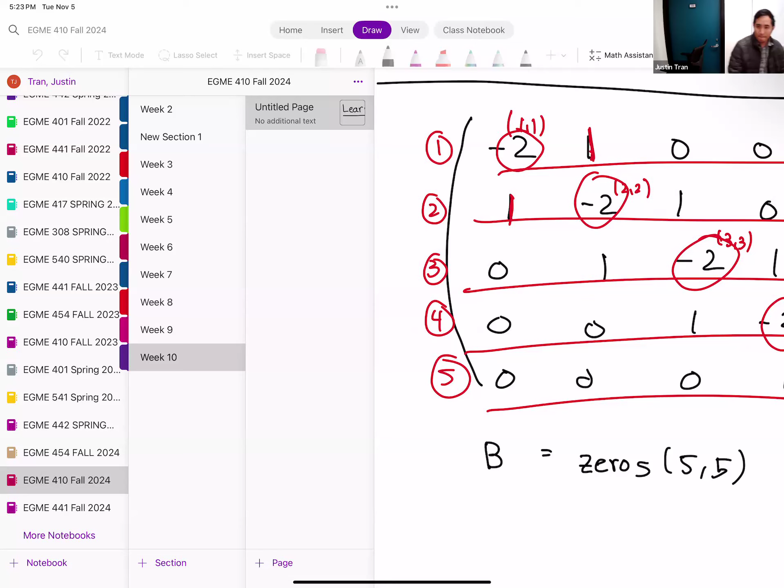I was studying for this combustion class. Oh, I see. Do you have a midterm recently? Midterm tomorrow. Oh, dang, pretty early. Yeah, that's good, second midterm. I was just trying to finish up during optimization. Oh, okay, I see. Now I'll catch up. Okay, sounds good.

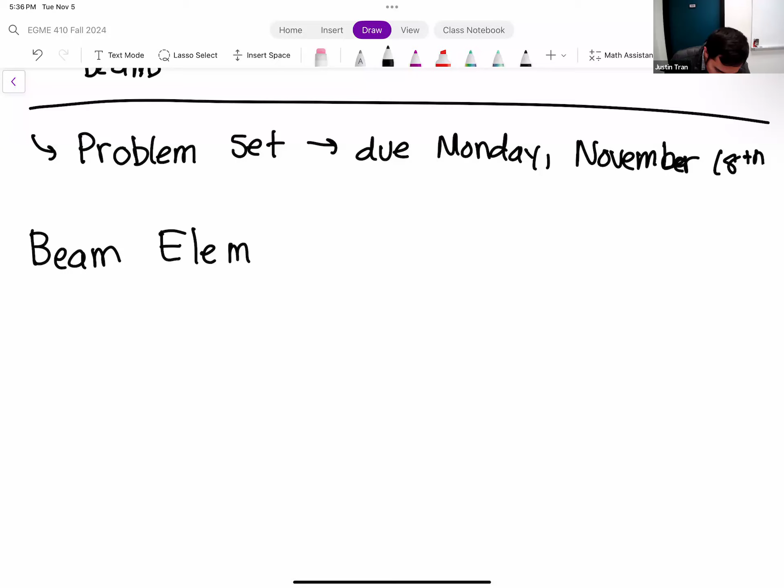We've seen beam elements before. If you think back to ANSYS activity 4, a big part of that activity was going over beam elements. When you compare a beam element to a traditional solid element, one of the unique qualities was that beam elements account for the rotation of the element itself.

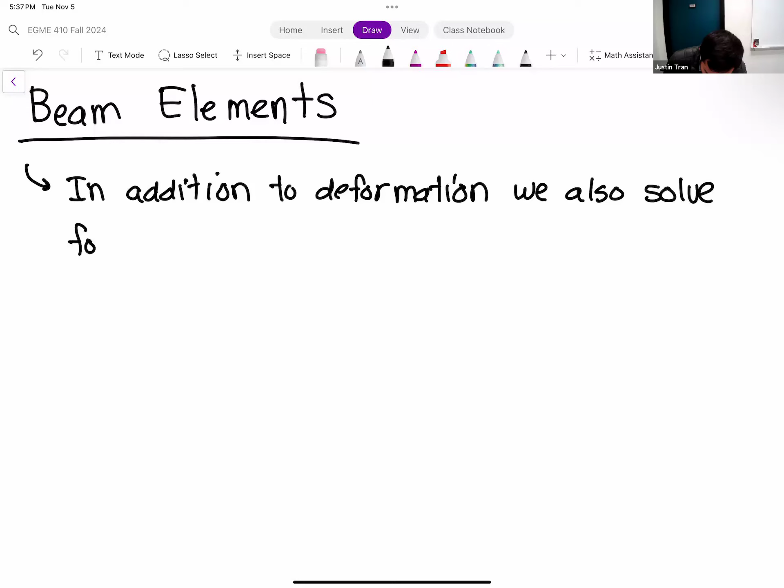In addition, every solid element type will compute deformations, and we saw that in our springs and trusses as well. What's unique about beams is that in addition to deformation, we're also going to solve for the element's rotations.

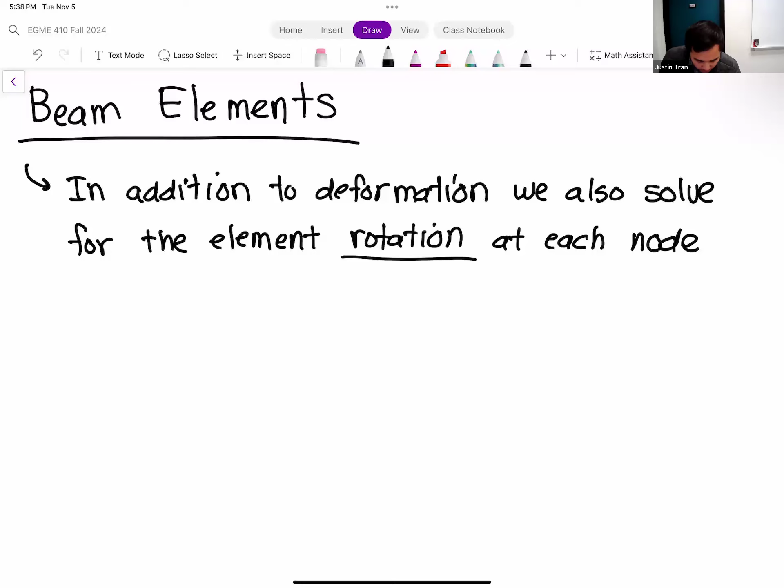Let's see what that looks like. We have our standard slender element that looks like this. The left side of the element we're going to call node 1, and the right side of the element we're going to call node 2.

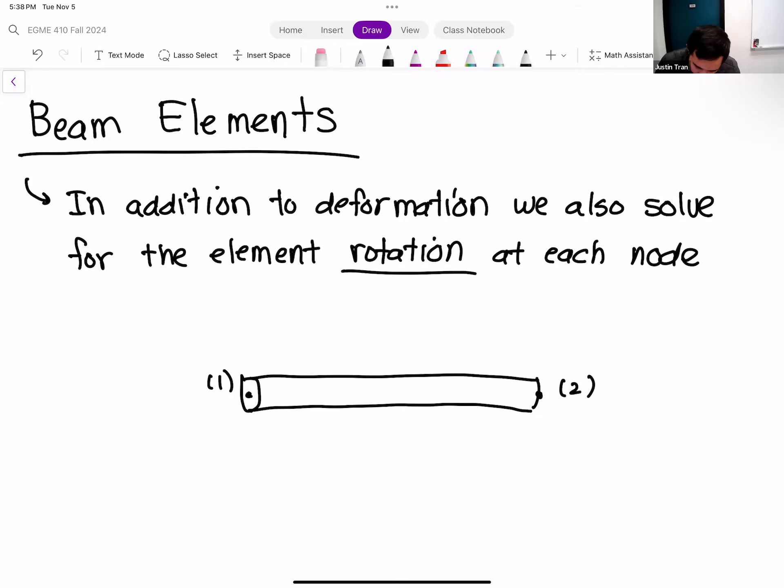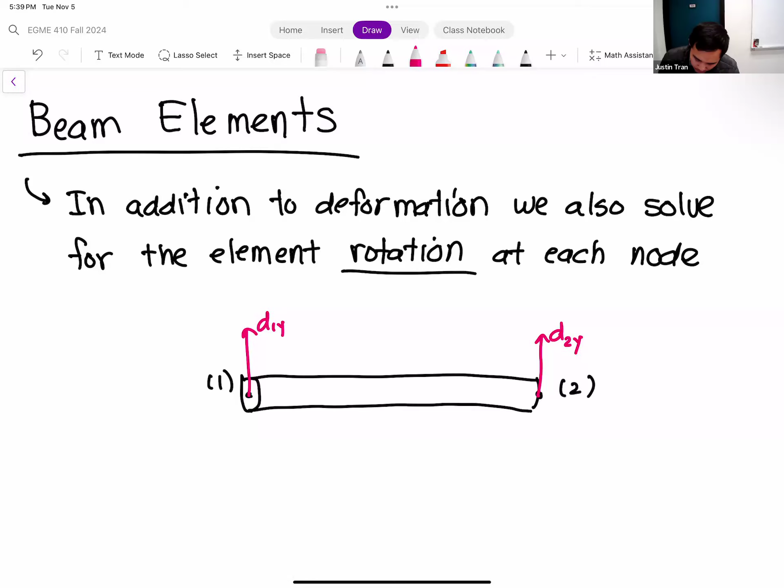So far in our truss elements we've only considered axial deformation - that's deformation that's parallel to the element itself. For beam elements, we're going to consider all other modes of deformation. Another way a slender element can deform is perpendicular to the element itself. We have D1Y and D2Y.

D1Y and D2Y here represent what's called transverse deformation - in other words, deformation that's perpendicular to the element itself. That's nothing too new, it's just adding another dimension to our deformation. But D1Y, D2Y, those are deformations at its core.

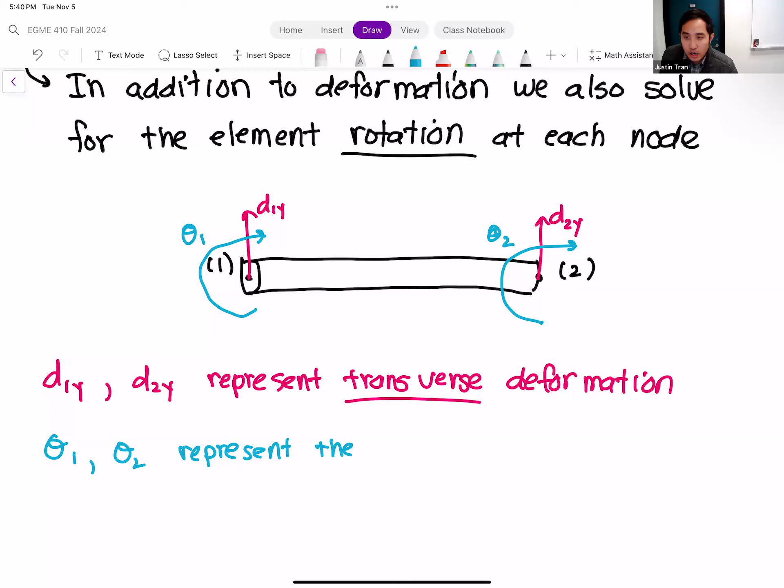What's unique about beams is that in addition to the transverse deformation, we can also compute the orientation or slant of the elements at those nodes. We denote those by angles: theta 1, theta 2. Theta 1 and theta 2 represent the element's orientation or tilt at nodes 1 and node 2.

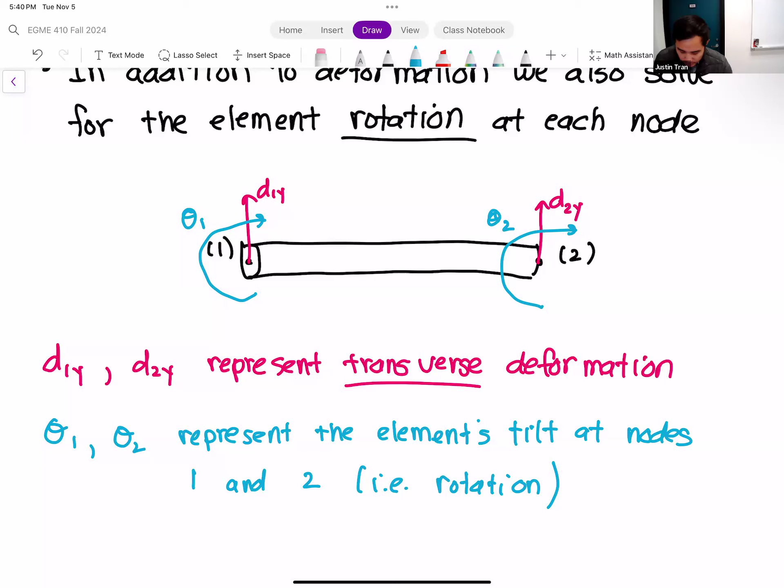So the beam elements that we're going to consider from here on out are going to have transverse deformation, so that's new. And it's also going to have rotation as well. So these four quantities are now going to be our degrees of freedom for our beam elements.

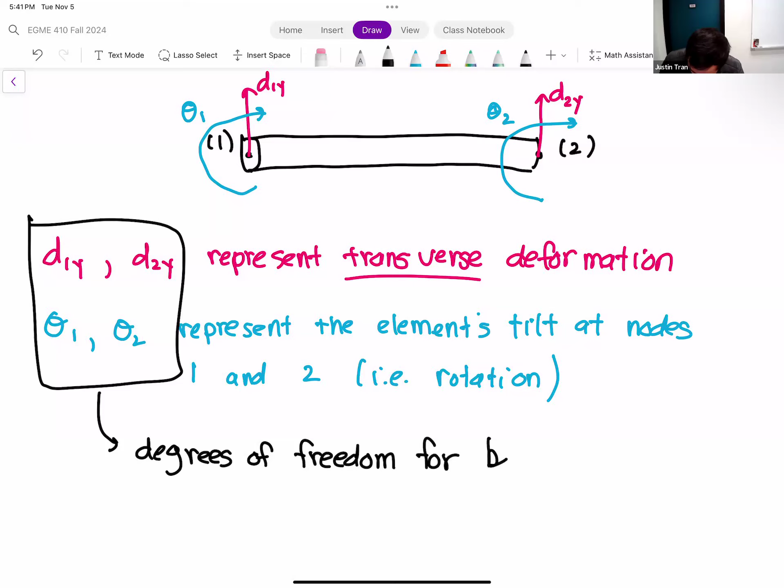So when we consider the transverse deformation, we consider the rotation, and we put that together with our truss deformations, which are the axial deformations, we basically covered all of our bases for 2D deformation of elements.

And so just to paint the picture here, truss elements and spring elements only have axial deformation. They have D1X and D2X. And I guess if you want to be specific, these are all deformations that are local to the element itself.

So that's the idea with beams. With beam elements, we're going to consider transverse deformation and rotation, and we're going to ignore axial deformation for now. We're going to bring those back eventually, so we're going to be able to do problems with beams and trusses and springs all together. Those things are not going to go away, but for now we're just going to focus on the transverse deformation and the rotations.

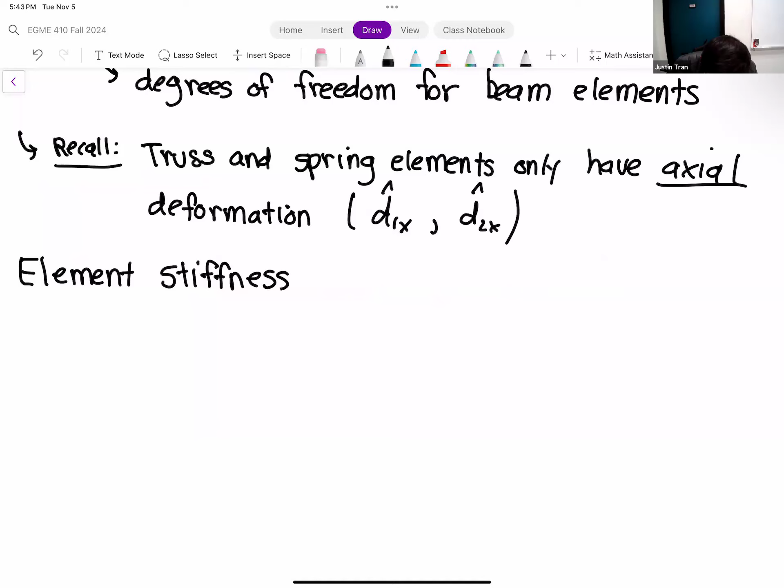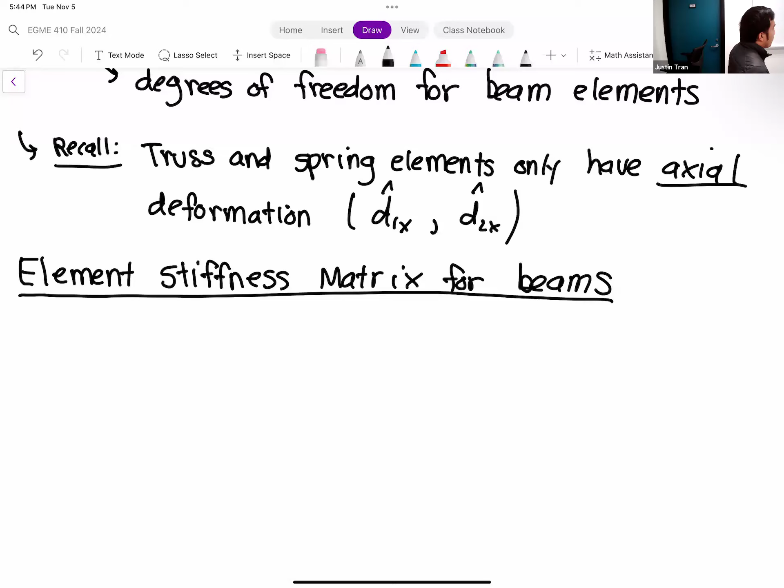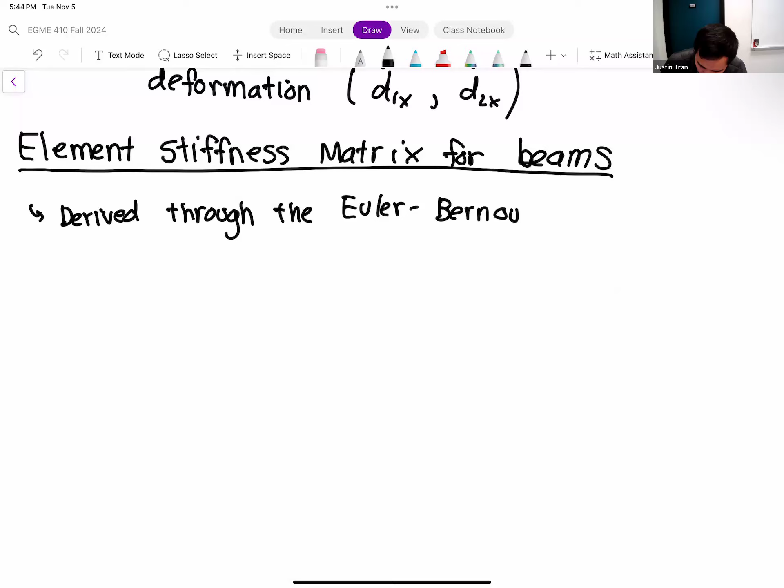So in the notes, you'll see that there is a derivation based on beam theory. I go through the Euler-Bernoulli beam equation, and I use that to derive the element stiffness matrix. We are a little bit behind, so I'm going to skip that derivation, and I'm just going to give you the formula for the element stiffness matrix straight up. This is derived through the Euler-Bernoulli details in the notes, but the element stiffness matrix is the following.

So first thing to note here is we have our constant factor out in front. We have E, E is a familiar player here. E is the Young's modulus of our element. I is something new, so I is the moment of inertia of the cross-section of our element. And we have L, which is the length of the element, which again is a familiar commodity.

So our element stiffness matrix for a beam is 4 by 4, because for every beam element we have 4 degrees of freedom. We have the transverse deformation at each node and the rotation at each node as well. So that's going to be four entries.

And so our element stiffness matrix here is 12, 6L, minus 12, 6L. That's the first row of the matrix.

And once again, I'm going to use the same trick that we used for the 2D truss element stiffness matrix, and just know that this is symmetric. So whenever you write a row, you can write it into a column. I'm going to leave the column blank just to save myself a bit of time, but remember that you can write it into the column there as well.

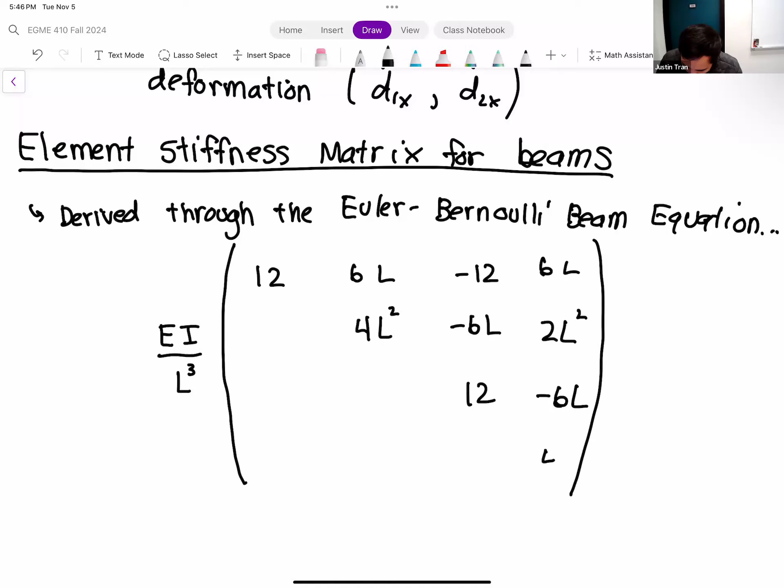Then we're going to multiply this by the degrees of freedom of the node itself. So here's where it gets a bit interesting, because we're actually kind of mixing different quantities with different units within the same matrix.

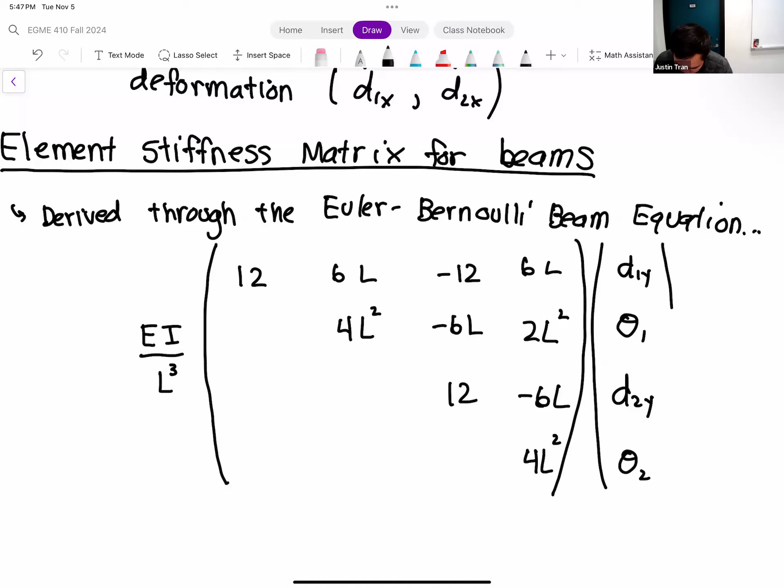So first row, that's going to be a transverse deformation row, so that's D1Y. Second row, it's going to be a rotational deformation, so that's theta 1. Then third row is going to be D2Y, and then fourth row is theta 2. So that's the matrix itself.

And then on the right-hand side, we have the corresponding nodal forces, or nodal loads. We have F1Y, M1, F2Y, and M2.

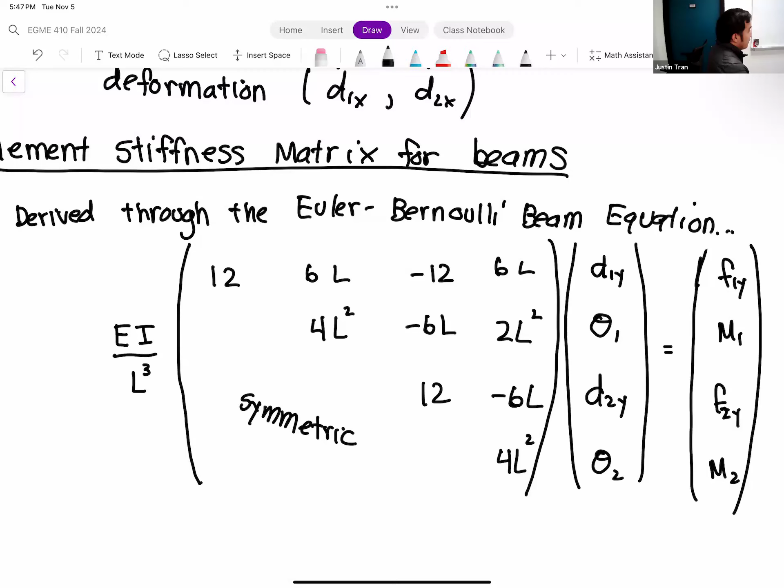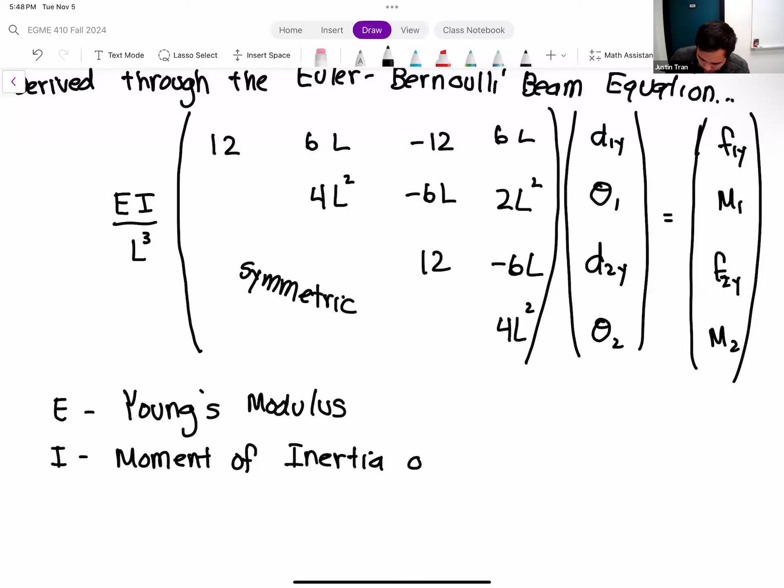Okay, so that is our element stiffness matrix there. Let me label a few newcomers here. So E here is the Young's modulus of the element. I here is the moment of inertia of the cross section.

L there is the length of the element.

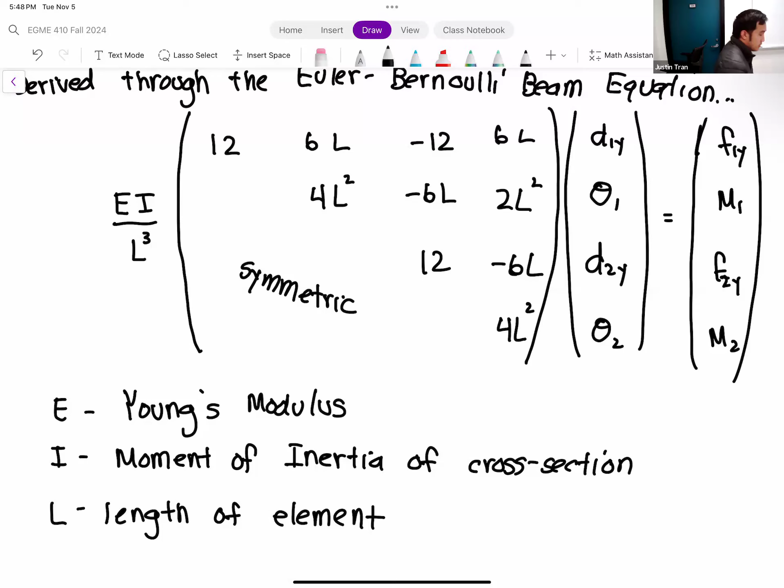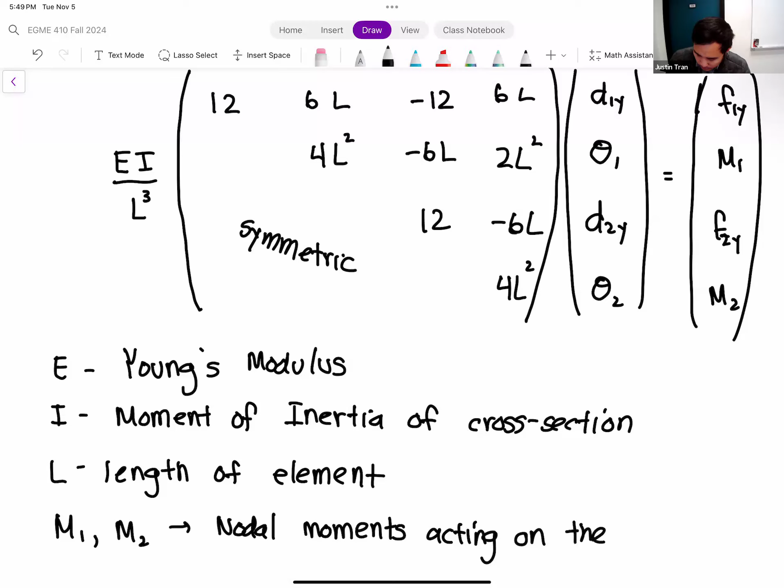And then the other newcomer here is on the right-hand side. For that forcing vector, we typically only have nodal forces, but for our rotations, we instead have nodal moments or nodal torques. M1 and M2, these are the nodal forces, or nodal moments, excuse me. So those are the moments that are acting on the nodes, right? So sometimes you'll hear me call them torques. Torques and moment, in this context are kind of interchangeable.

All right. Any questions on the element stiffness matrix for a beam?

All right, so that's the main part of this lecture here, and we're going to be doing some examples soon. For the examples, they're going to follow the exact same process that we've done before. The only thing is that for beams we're going to use this element stiffness matrix instead of the other one. But we're still going to follow the same process of element stiffness matrix, assembly, boundary conditions, and solve. The only thing that changes here is the element stiffness matrix.

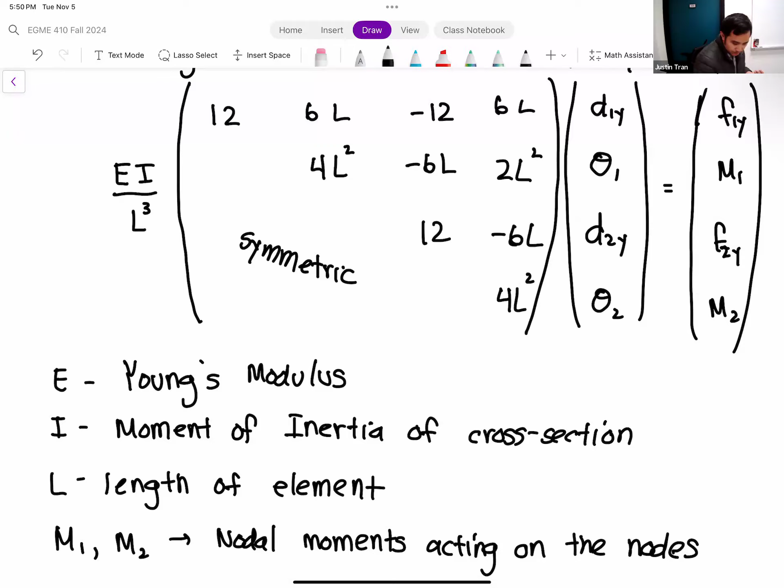But before we jump into an example, I do want to revisit the idea of the supports, or in other words, we're looking at the constraint type boundary conditions.

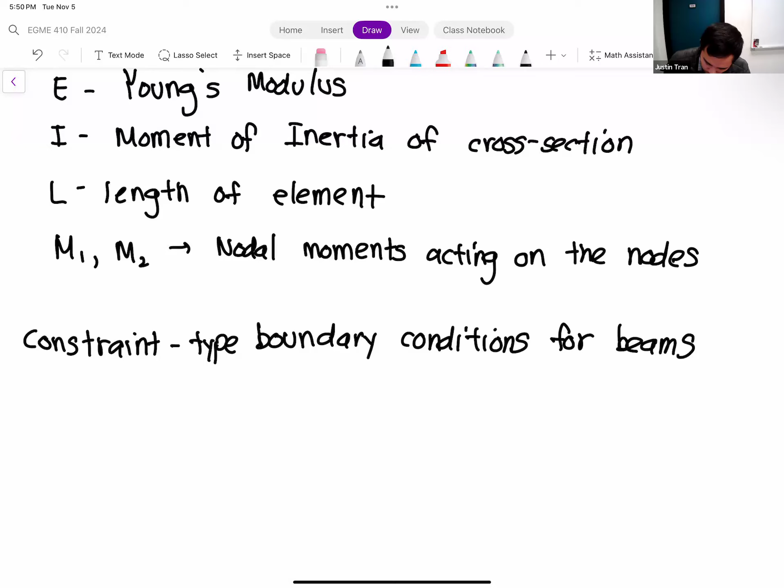Because now we have a bit more to think about because we have so many different dimensions of deformation.

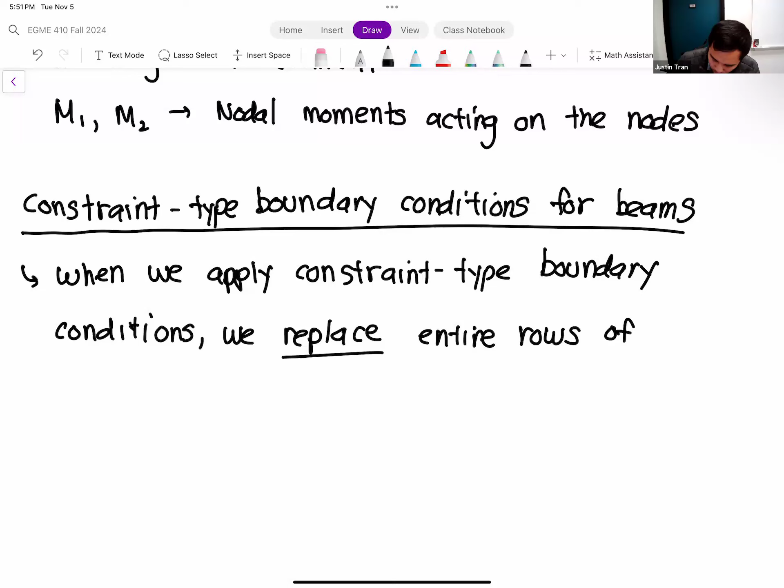So if you think back to the way that we usually apply our constraint type boundary conditions, remember the way we apply them is we replace entire rows of our global stiffness system. And so the rows that we end up replacing for our global system depend on the degrees of freedom that are constrained.

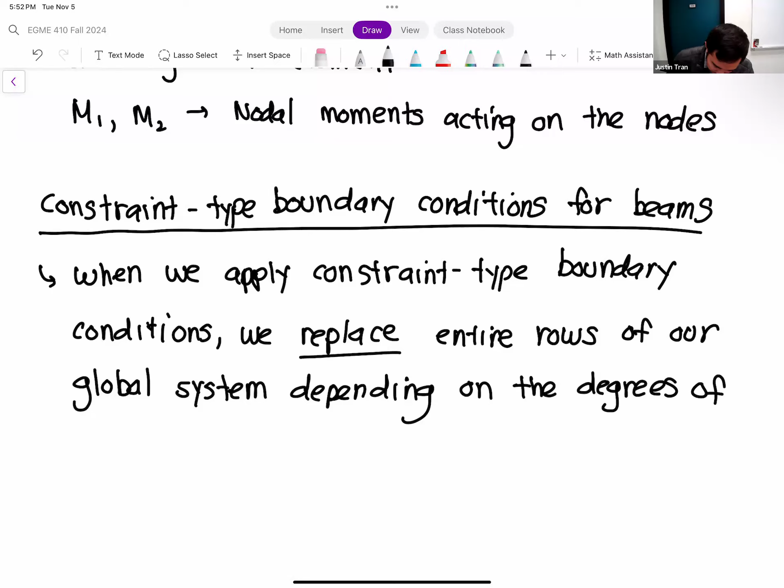And so if you think back to the last example that we did, last Thursday, we introduced this concept of a roller support. And with the roller support, we only cancel out one dimension of the deformation.

So when we started doing 2D problems, we introduced this concept that each node can have multiple degrees of freedom. You can have an X deformation and a Y deformation. If you're fully constraining that node, back then a full constraint would just be a pin support, which would cancel out both the X and Y deformations at that node. But if we had a roller support, that means we'd only cancel out one component of the deformation, and we'd leave the other one free to do what it wants.

So now that we're introducing this idea of a rotational degree of freedom, we need to know how that degree of freedom is constrained relative to the constraints that we have.

So for our beam equations here, we actually have three types of constraints, and I'm going to go from most constraining to least constraining.

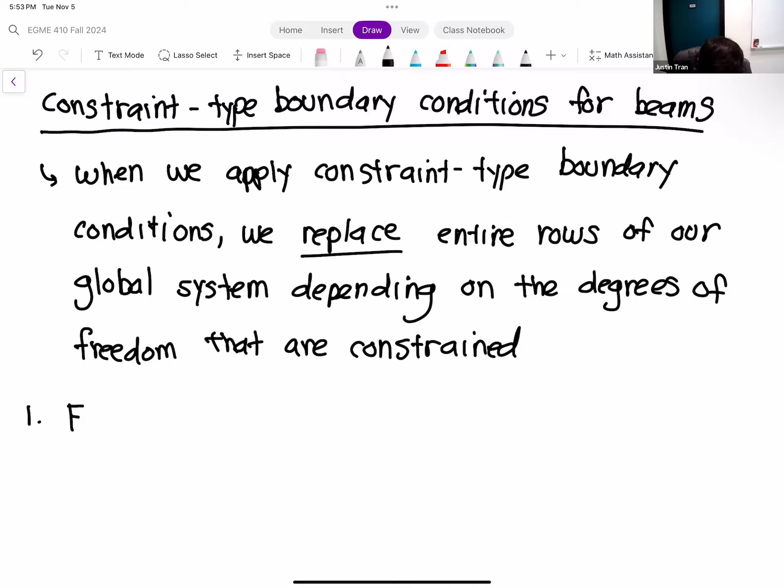All right, so the first one that we have is a fixed support. A fixed support is the most constraining thing that you can have, right? Visually, the way that we draw this is as if the beam is stuck or welded to a wall. You can see here the beam is kind of stuck, it's almost just like it's jutting out of the wall itself.

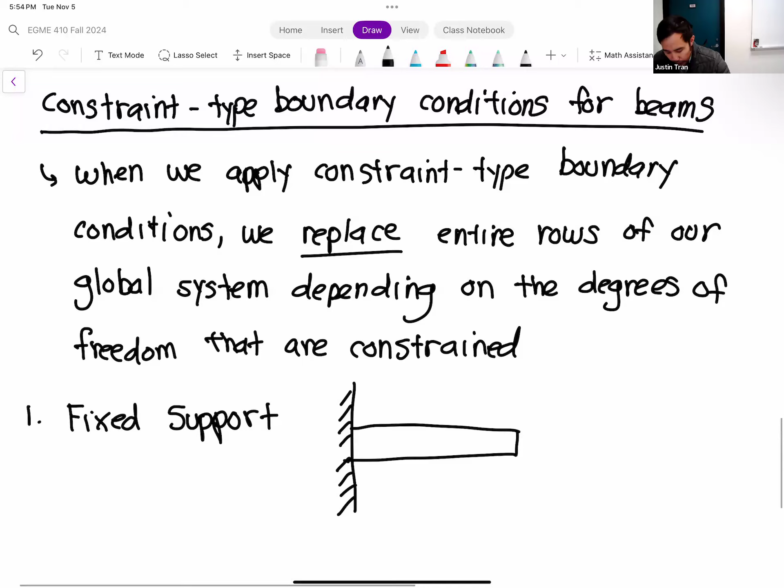So this is the most constraining, and all three dimensions or all three types of deformation are going to be constrained with this support. So you have d1x equal to 0, d1y equal to 0, and theta1 equal to 0 here, where node 1 would be the node that's attached to the wall.

So fixed support, all degrees of freedom constrained.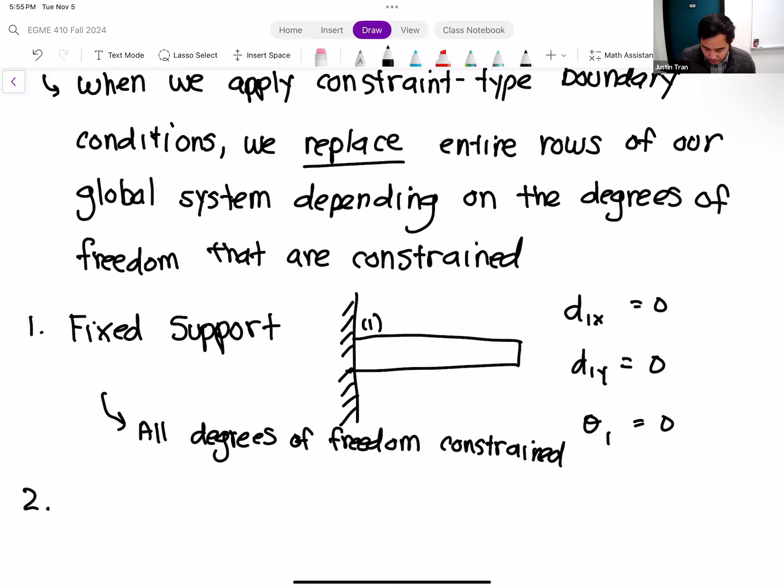Second type of constraint that we have is a pin constraint or pin support. A pin support is basically a support that looks like this, so it looks like the beam itself is kind of pinned to the ground.

And for a pin support, we'll constrain all of the dimensions of deformation, so d1x and d1y are equal to 0. But the thing that separates a pin support from a fixed support is that a pin support is allowed to rotate, so the theta dimension here is actually going to be free. So a pin support, to summarize, does not constrain rotation.

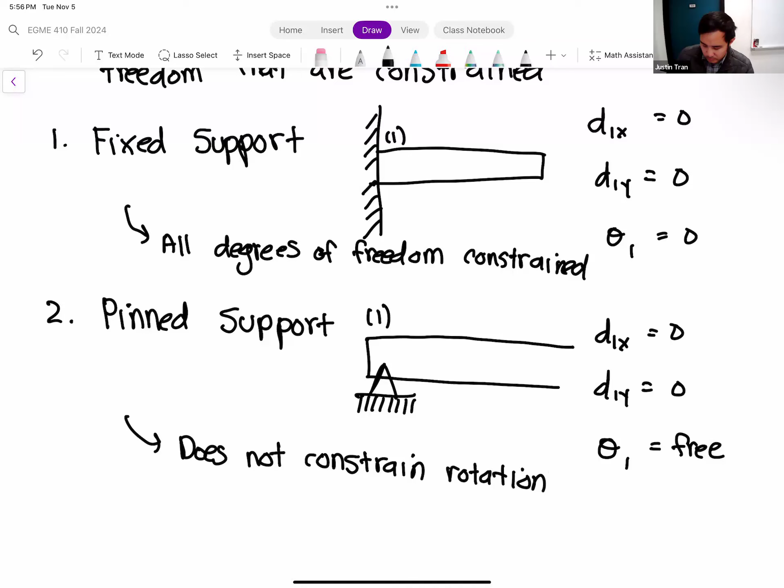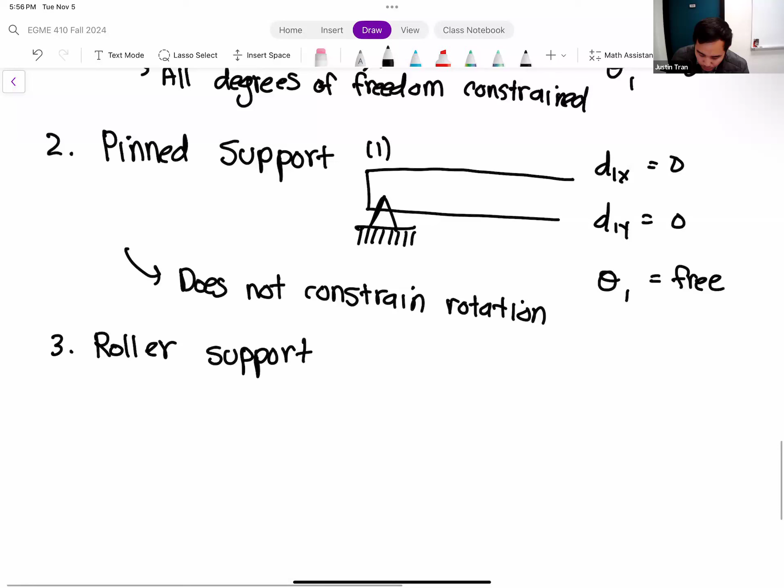Okay, finally we have the roller support. The roller support visually looks something like this. We have our beam, and it's on a support, but that support has wheels, okay?

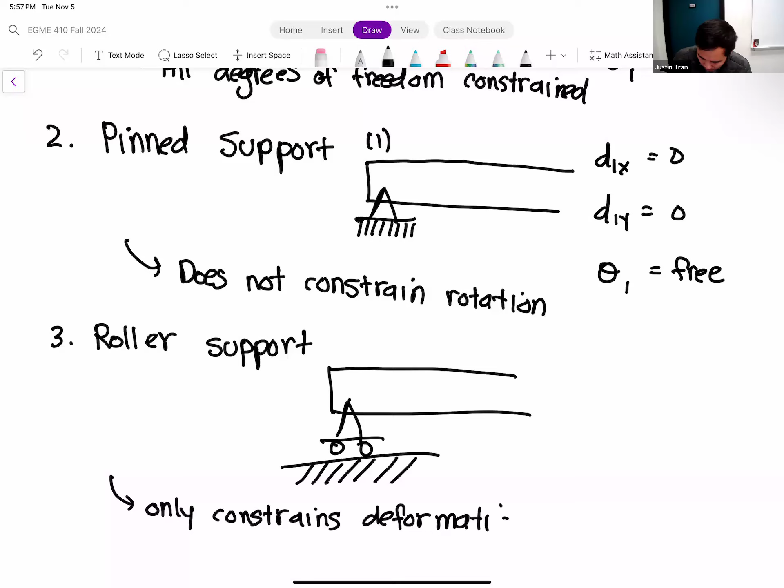The roller support here is only going to constrain one dimension of deformation, and that's the deformation perpendicular to the roller. In this case, the y direction is the one that's constrained. So d1x is actually going to be free, d1y is going to be 0, and theta1 here is going to be free.

So when you're doing these beam problems, definitely pay close attention to the types of supports you have, because that's going to change how you apply the boundary conditions to your global matrices. Any questions on this before we jump into an example?

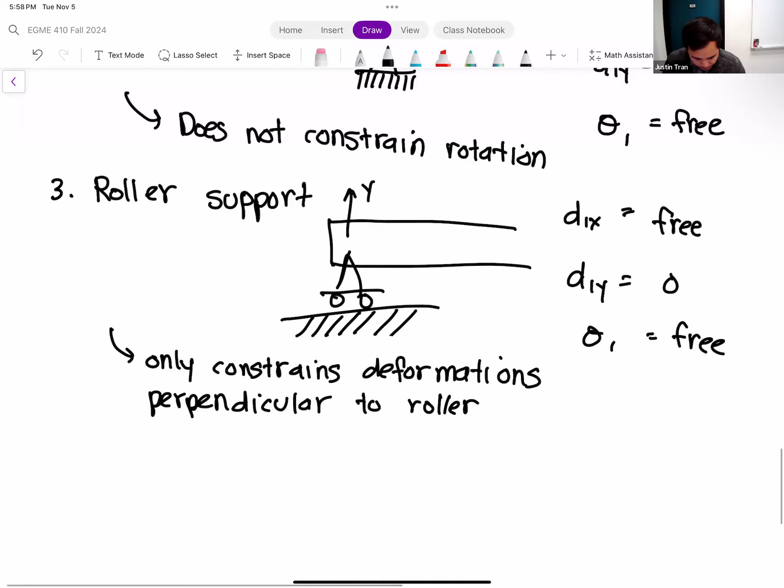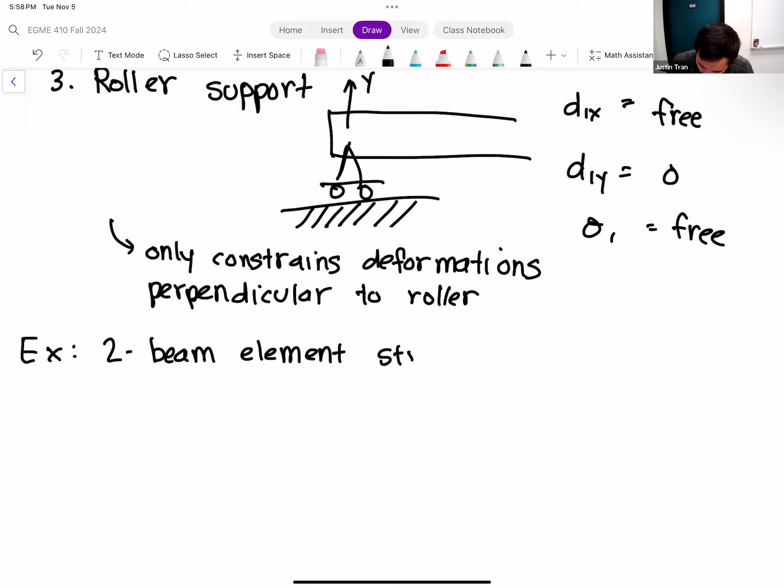Alright, let's go ahead and do an example. Pretty straightforward one, but just to show you how this all works out. Let's consider the following structure that has two beam elements.

So the first thing we have here is a wall, so we have one node that's going to be fixed to that wall. So you have node 1 here. This first beam is going to be beam A, and beam A is going to be connected to another beam here, so that's going to be beam B.

So we have 3 nodes here. Node 1 that's fixed to the wall, node 2 that's going to be right in between elements A and B, and then node 3 here that's going to be at the end.

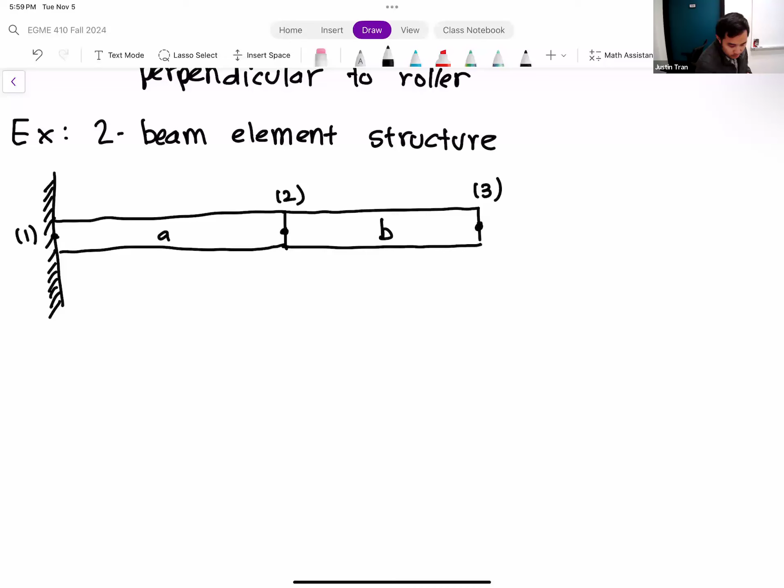Alright, so we're going to assume that each of the beams are identical, so they each have the same length, and they're going to have the same Young's modulus and same moment of inertia as well. So E, I are the same for both elements.

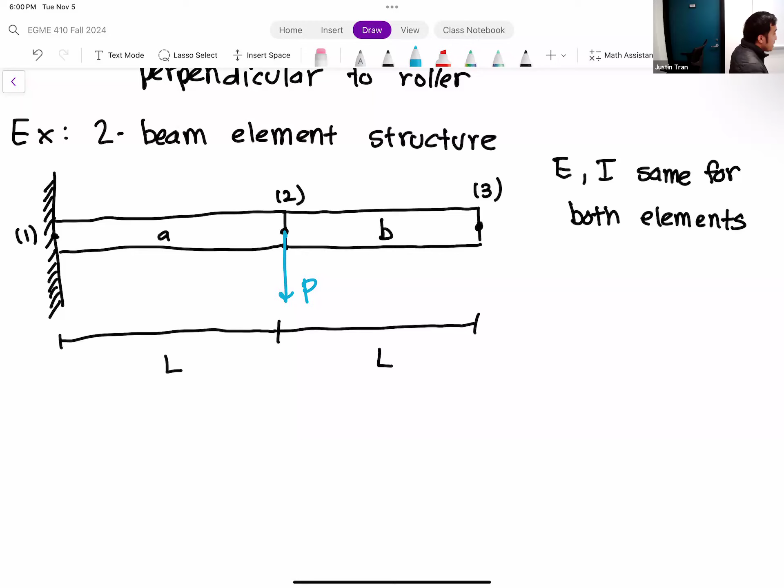Alright, let's include some loads. All of our loads here are going to be applied at node 2. The first load we have is a downward force with magnitude P. We're going to include another load at that node as well: a moment or torque M that's being applied at node 2 as well.

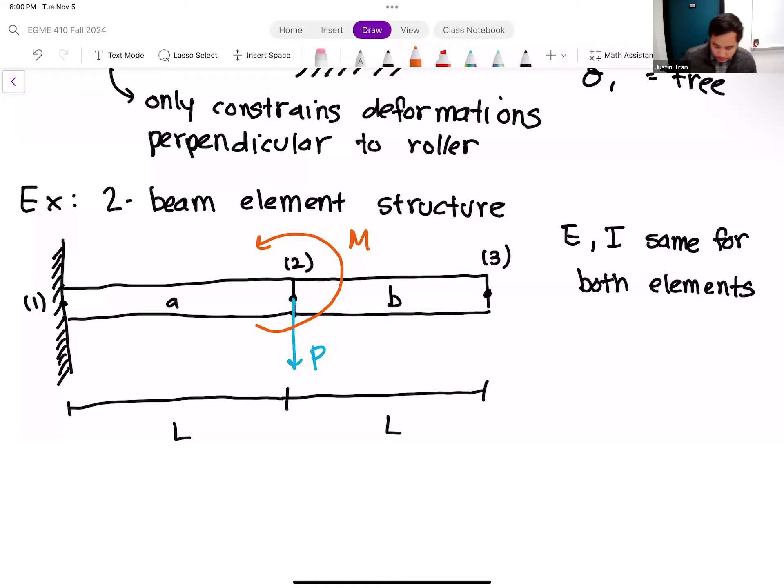So we can say force load P and moment load M, both applied at node 2.

Oh, forgot one extra support here. The last thing to add is that we actually have another support, so we have a pin support at node 3. Okay, alright, so that's our problem.

So what we want to do here - I'm not giving you any numbers, so we're just going to do this problem completely in symbols - let's write out the global stiffness matrix along with the boundary conditions applied.

Alright, so let's compute the global stiffness matrix with boundary conditions applied.

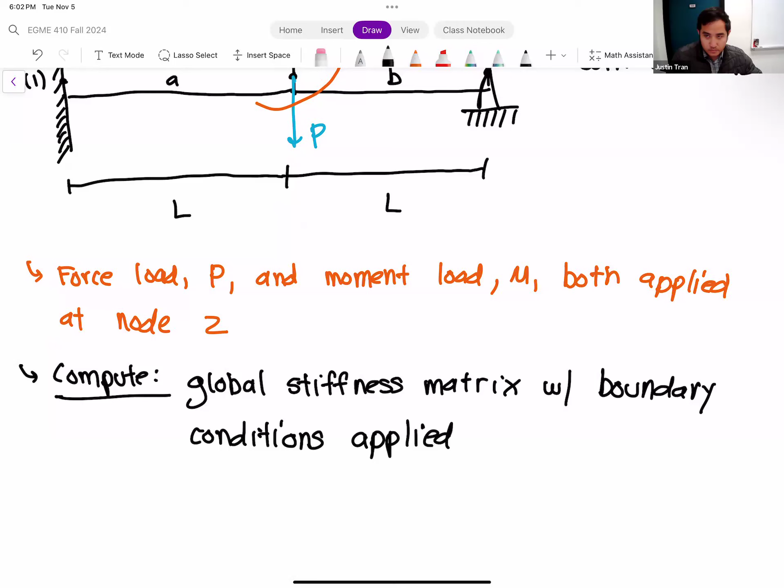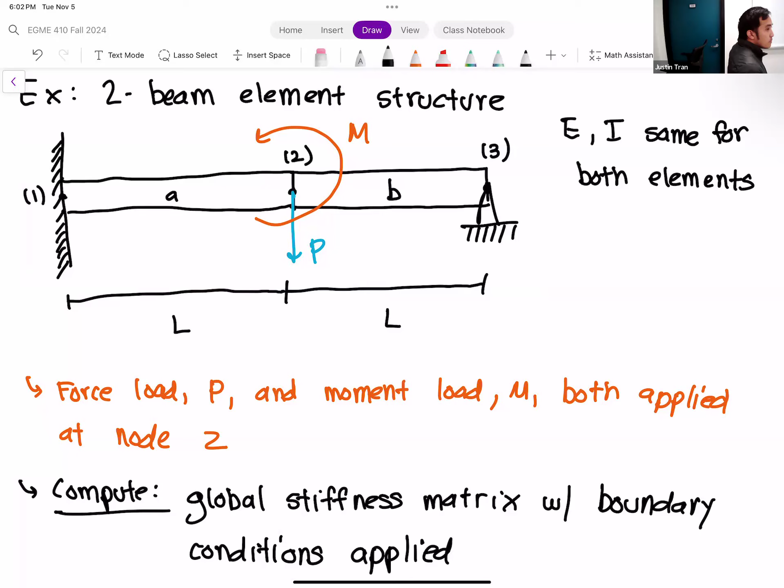Any questions on just how this problem is set up here? Alright, so let's go ahead and run through the problem.

So we have ourselves a very classical direct stiffness problem, except with beams. That's the only new wrinkle here, that we have new beam elements. But we're going to solve this in the exact same way we did before, so we're going to first start out with the element stiffness matrices of each element.

This part here isn't going to be too exciting just because we don't have numbers to plug in, but let's write out the element stiffness matrices for elements A and B, okay? Remember, one important part of the element stiffness matrices is that you have to indicate which nodes that element is connected to. So let's start with element A.

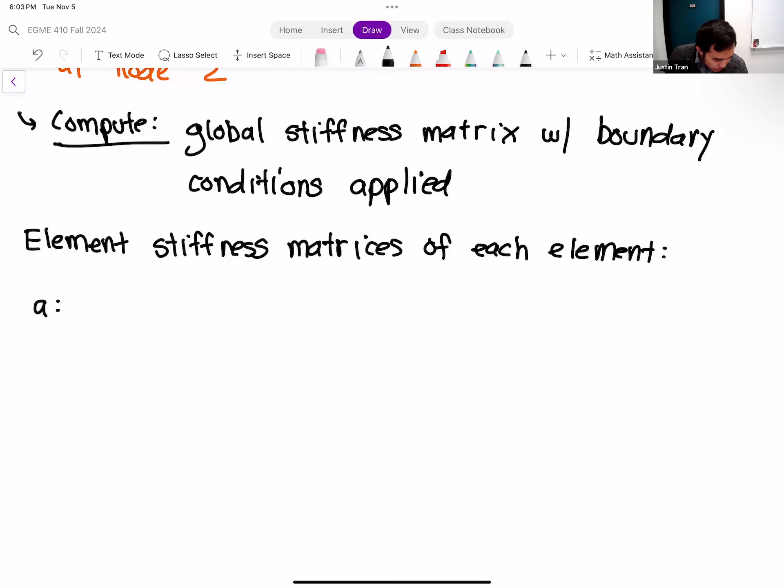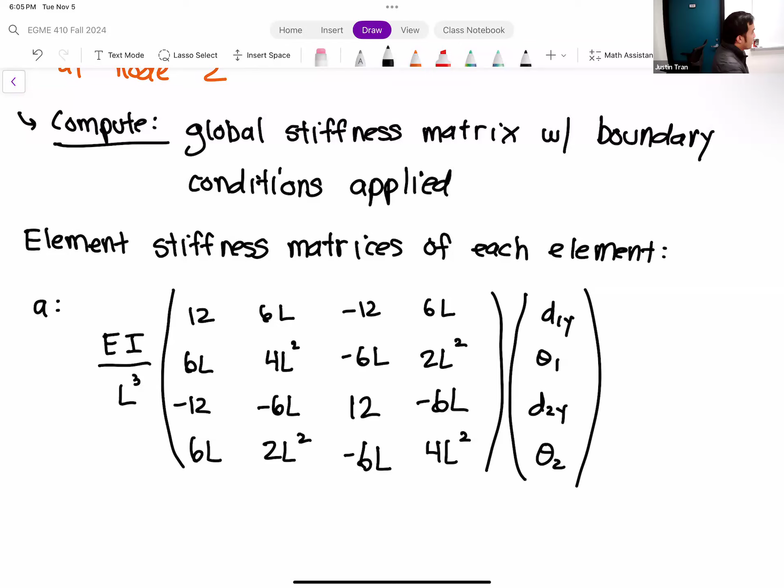Okay, and we multiply that by our degrees of freedom for the nodes that we are connected to. Element A here is connected to nodes 1 and 2, so that's D1Y theta 1, D2Y theta 2.

Element B is going to be the exact same. The only difference is that element B is connected to nodes 2 and 3. So it's EI over L cubed multiplied by 12, 6L minus 12, 6L, 6L minus 12, 6L.

So the matrix itself is exactly the same, and that's because both beams here are exactly the same. The only difference here is that element B is connected to nodes 2 and 3, so we have D2Y, theta 2, D3Y, theta 3.

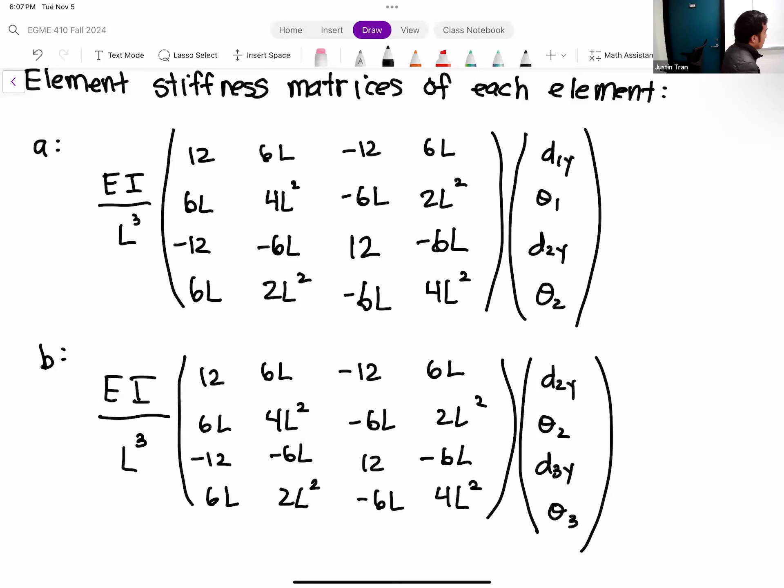And so of course, if we had numbers for this, we'd plug in the numbers here, but this is just a quick example to start with. Any questions on how we got these matrices here? Okay, good. All right, so the next step is assembly.

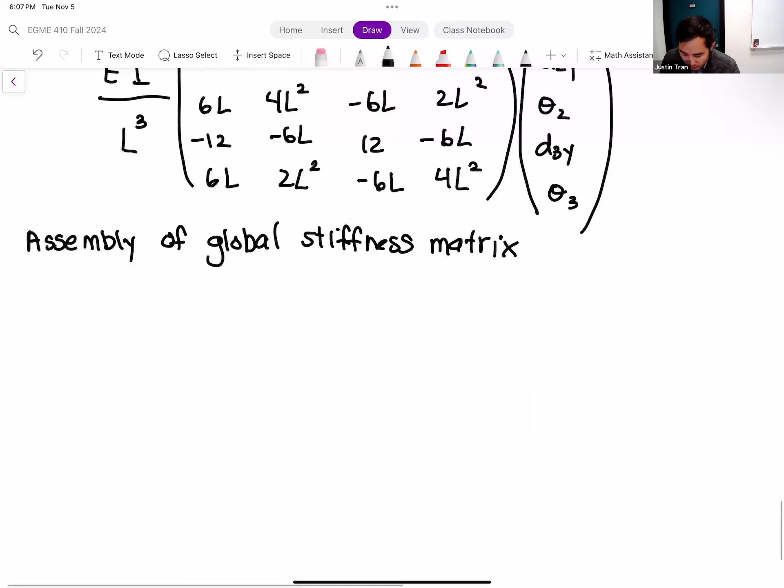So we're going to assemble our global stiffness matrix from here. Remember, our global stiffness matrix is the matrix that's going to govern the behavior of our system as a whole, and so it has to include all of the degrees of freedom for all of the nodes in our system. We have 3 nodes in total, and each of those 3 nodes are going to have 2 degrees of freedom - a transverse deformation and a rotation. That means in total, our global stiffness matrix here should have 6 rows and 6 columns. So it's a 6x6 matrix.

Okay, so let me leave myself enough room to write everything here. And so the 6 rows of our matrix are going to correspond to each of the degrees of freedom. So we have D1Y, theta 1, D2Y, theta 2, D3Y, theta 3. This is all equal to the nodal forces, so we have F1Y, M1, F2Y, M2, F3Y, M3.

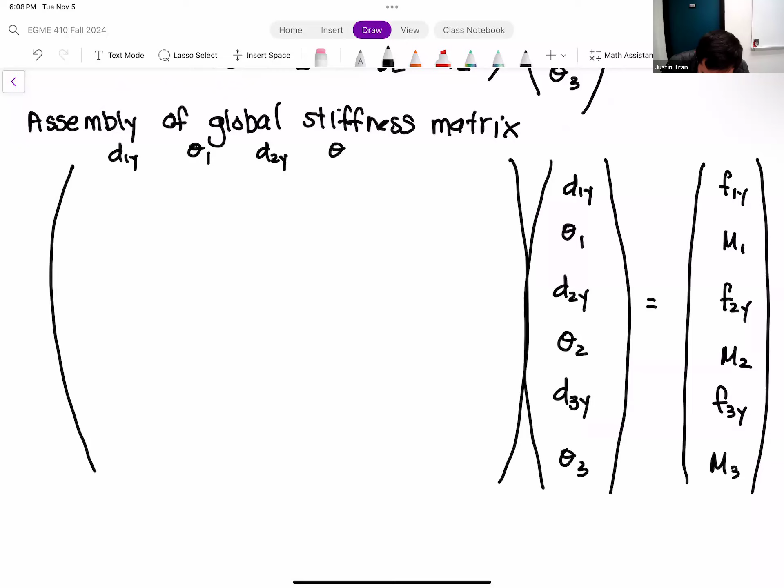Okay, and let me write out the columns as well. So we have D1y, theta 1, D2y, theta 2, D3y, theta 3. So the columns there just match the rows.

Okay, so just like we usually do at this point, we're going to take our element stiffness matrices and insert them into the global stiffness matrix, depending on which nodes that they are aligned with. Okay, so let's start with element A.

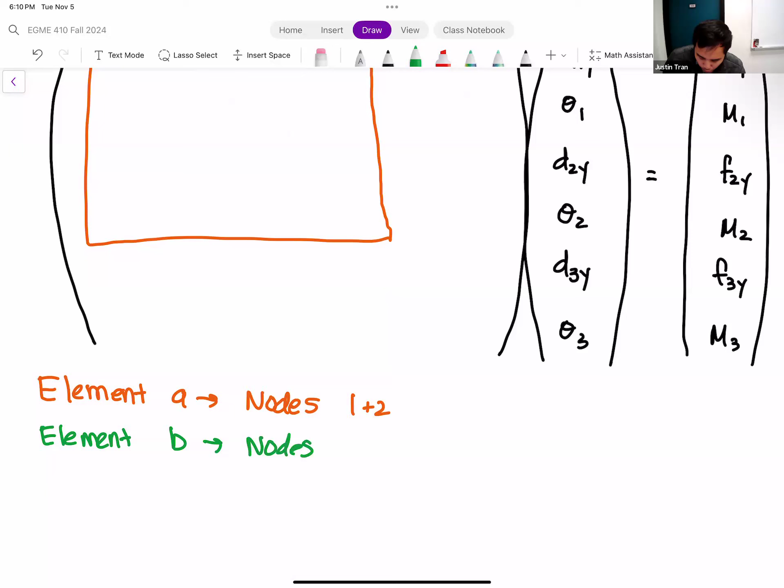We know element A is connected to nodes 1 and 2, and so that's going to be this section of the matrix right here. And then element B - element B is just nodes 2 and 3, so nodes 2 and 3 are going to be this section right here.

All right, so let's go ahead and fill in each of the element stiffness matrices, remembering that whenever you have an element stiffness matrix that overlaps with another one, you're just going to add those entries together. Okay, so let's start with element A. So element A here, we have 12, 6L, minus 12, 6L, 6L, minus 12, 6L. We have 4L squared, minus 6L, 2L squared.

Next, we have the overlap region, so I'm just going to leave some space there in order for us to add the entries from element B. We have 12, minus 6L, minus 6L, and then 4L squared.

And then we have the same thing for element B. So element B here, we're going to add the plus 12 plus 6L, minus 12, 6L. We have a positive 6L minus 12, 6L. Second row, we have a 4L squared - we're going to add that there. Minus 6L, 2L squared.

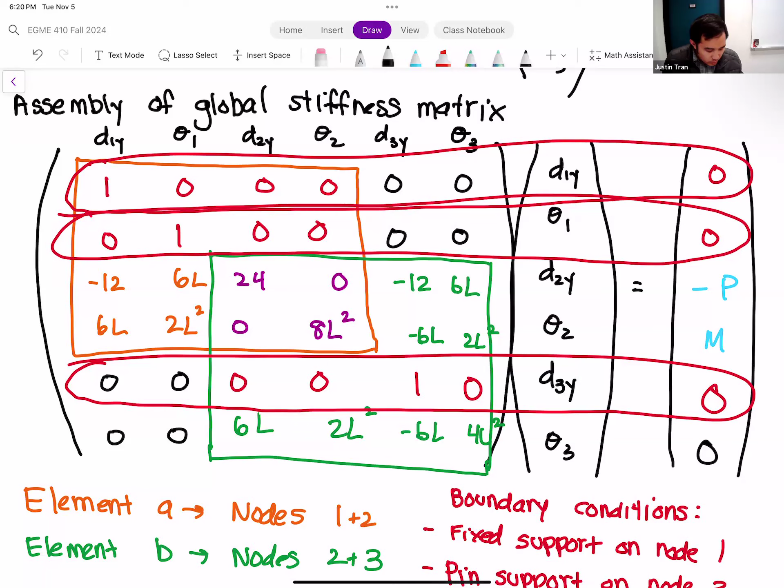All right, so let's jump into another example. This one's going to be a little bit more interesting because we're going to combine our beams together with a spring. In this example, we're going to do a beam that's supported by a spring on one side.

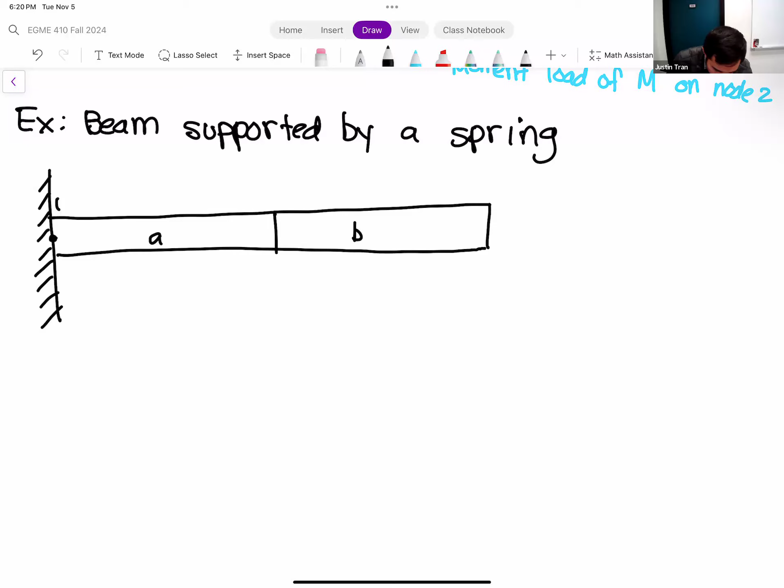Okay, so the figure for this one looks something like this. Once again, we have a fixed support at the wall. We're going to have two beams here, so one beam that's split into two: element A and element B. We have node 1 at the wall, node 2 in between the two elements, and node 3 at the end.

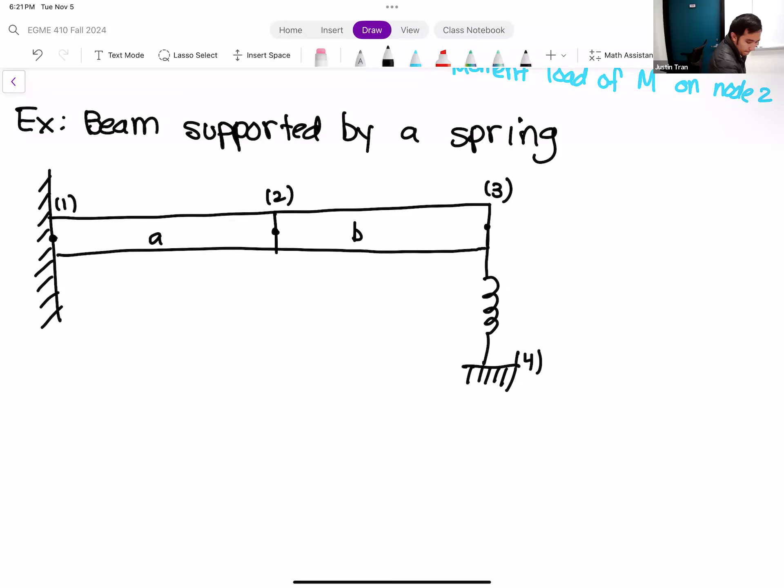So it looks very similar to the last example we did, but instead of a pin support at the end, let's say the end of that beam is actually supported by a spring instead. At the end there, we have a spring attached, and the spring is perpendicular to the beams. That's going to be really important when we form our element stiffness matrices. And that spring is fixed to the ground at the bottom at node 4.

Let's talk loads. We have a load here that's applied on node 3. Let's say we have a load P that has a magnitude of 50 kilonewtons being applied on node 3.

And unlike the last problem, we're actually going to do some numbers here, so we're going to plug in and see how that all works out. Let's start with the Young's modulus for both beams, which are going to be the same: 210 gigapascal. We have the moment of inertia, which is 2 times 10 to the minus 4 meters to the fourth.

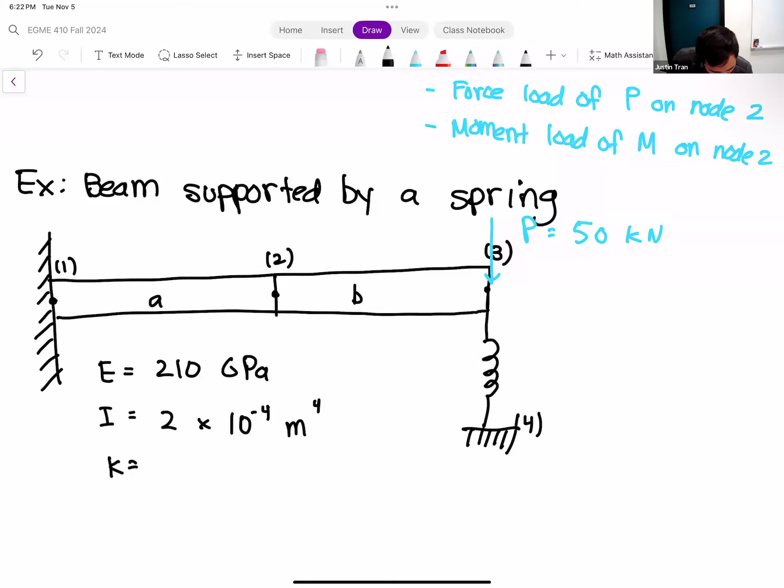And then we have K, which is for the spring - this is the spring constant for the spring. This is 200 kilonewtons per... Oh, we need the lengths. The length for each of the beams is 3 meters, so it's a fairly long structure - the entire structure is 6 meters long. That's pretty massive.

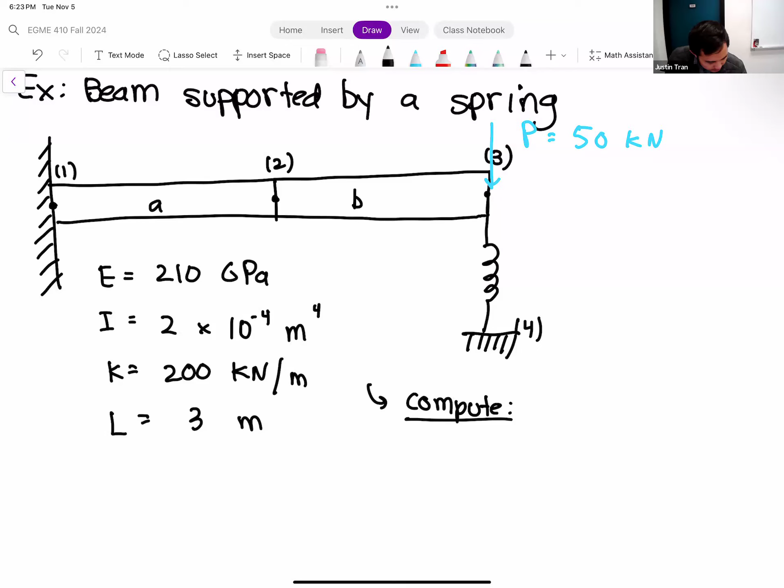So what we want to compute: let's compute the nodal deformations for each node in this structure. All right, any questions on the setup of the problem?

Okay, so this is a slightly more interesting problem. We have numbers here, but also we have a spring, right? And we just got done talking about how springs and beams have totally different deformation modes. So the question now is, how are we going to combine the element stiffness matrix of the spring together with those beams? You'll see in a second, the key here is to note that the spring is actually perpendicular to the beams itself.

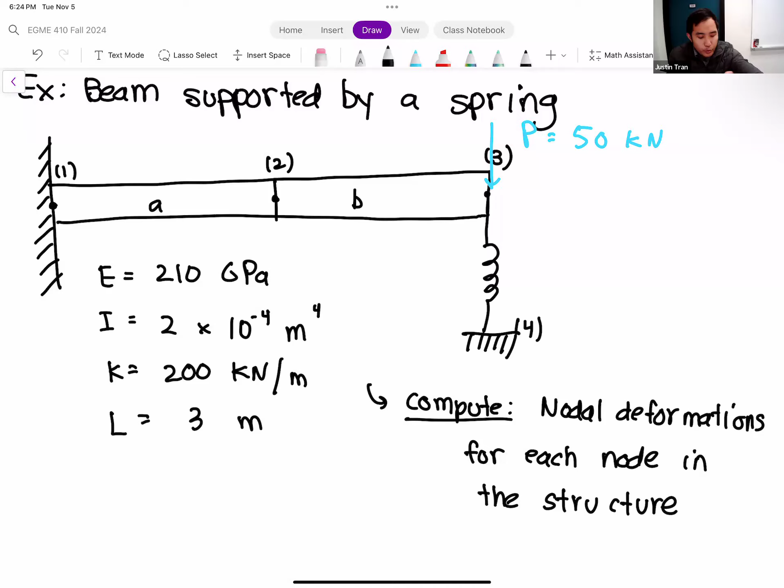But let's start this problem like we usually do - let's start by writing the element stiffness matrices for each element. Actually, we're going to plug in numbers at the end, but just for the sake of simplicity, I'm going to go ahead and do this for symbols for now. I would like to finish this example before we end it, but we'll see.

Element A and element B are both beams, and in fact they have identical properties once again. So I'm going to go ahead and just write out their element stiffness matrices very quickly. For element A, we have EI over L cubed multiplied by: 12, 6L, minus 12, 6L; 6L, 4L squared, minus 6L, 2L squared; minus 12, minus 6L, 12, minus 6L; 6L, 2L squared, minus 6L, 4L squared.

Element A is connected to nodes 1 and 2, and so our degrees of freedom here are going to be D1y, theta 1, D2y, theta 2.

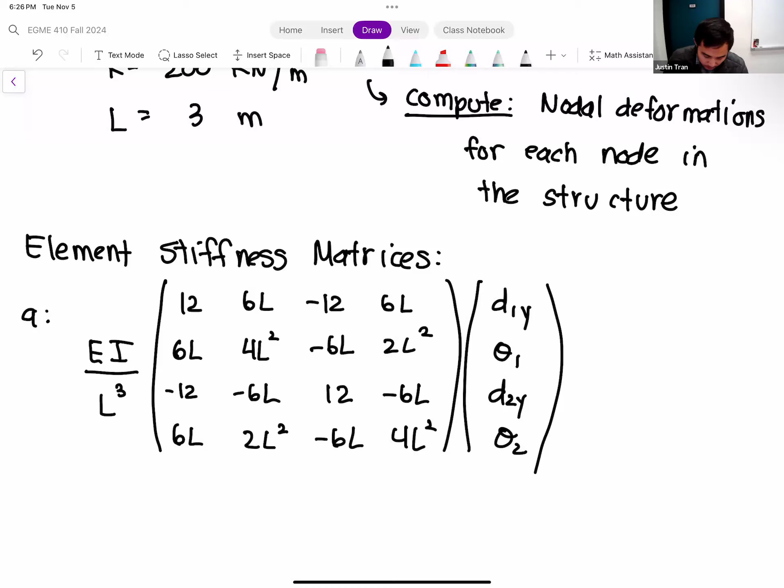Element B is going to be exactly the same - the only difference is that element B is connected to nodes 2 and 3. So let's go ahead and write that down really quickly.

We have the exact same element stiffness matrix as element A. The only difference is that we are connected to nodes 2 and 3, so D2y, theta 2, D3y, theta 3.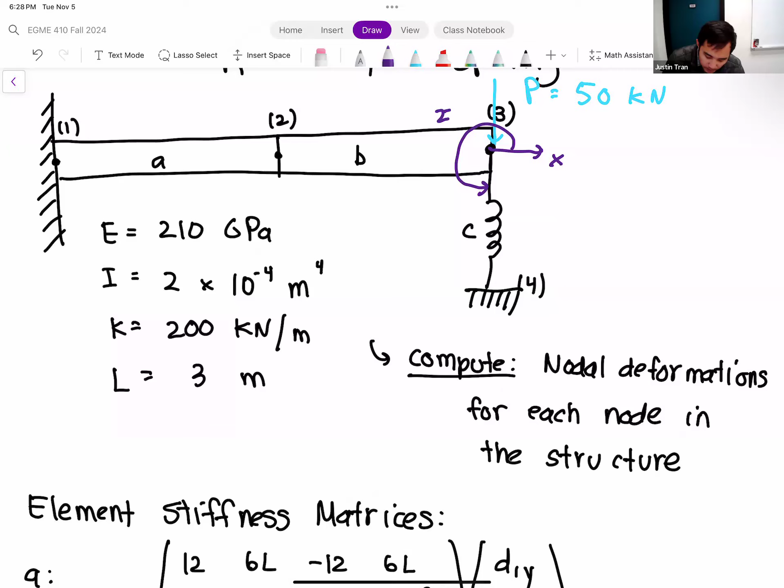If we rotate counterclockwise, we can see that we rotate by an amount of 270 degrees. So theta here is 270 degrees, or if you use -90, that works too. And so if we take sine and cosine, cosine of 270 is going to be 0, sine of 270 is going to be -1.

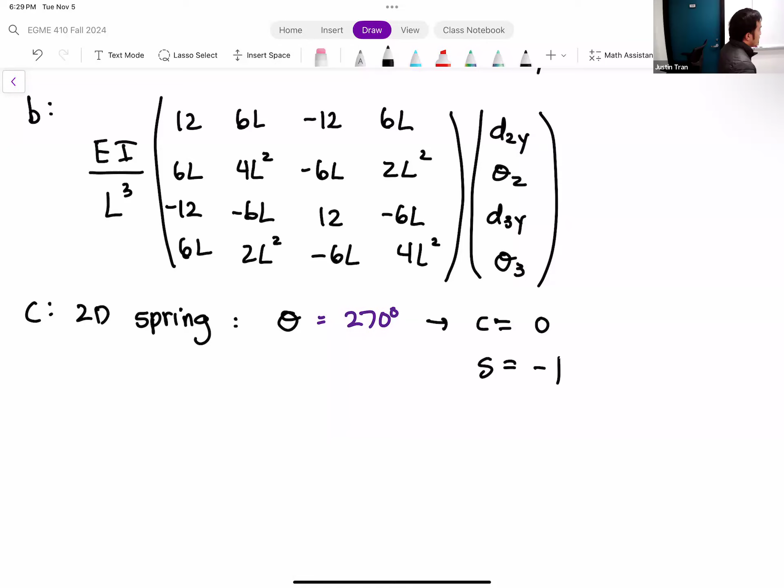So let's go ahead and plug in to solve for the element stiffness matrix here. For the element stiffness matrix for the spring, we have our spring constant K that's out in front.

I'm going to go through this really quickly just because I know the cosine terms are 0, so everything with the cosine is just going to be 0. That means the entire first row, we're just going to have 4 zeros in a row: 0, 0, 0, 0. Second row is going to be 0, 1, 0, -1. And then this is going to be multiplied by, first of all it's nodes 3 and 4, but it's the transverse and axial deformations for nodes 3 and 4. So you have D3x, D3y, D4x, D4y.

So at this point, we have our element stiffness matrices, and we should be ready to plug them into our matrix here. But before we do that, I'm going to make our lives a little bit easier.

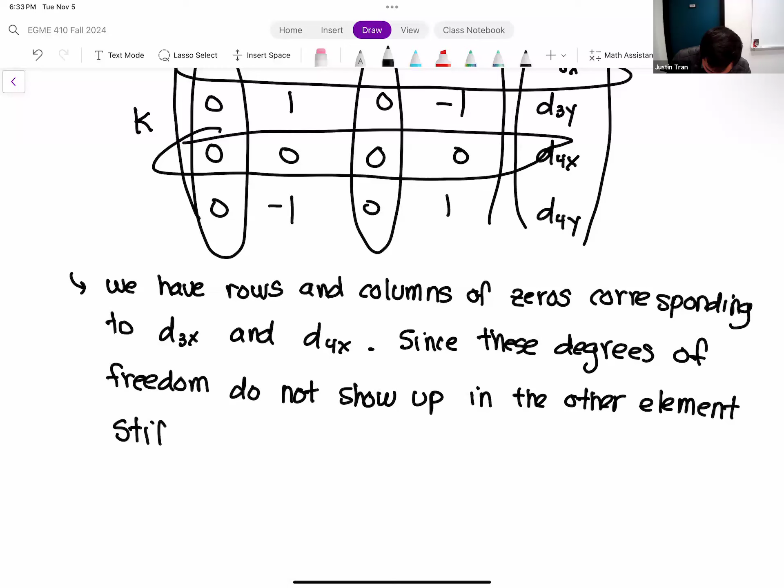And so since these degrees of freedom don't show up in any of the other element stiffness matrices, then there's no way for us to affect their values at all. And so if that's the case, if there's no way for us to affect those entries, let's go ahead and eliminate those from our system right off the bat, just so we don't have to worry about writing them out in our assembly.

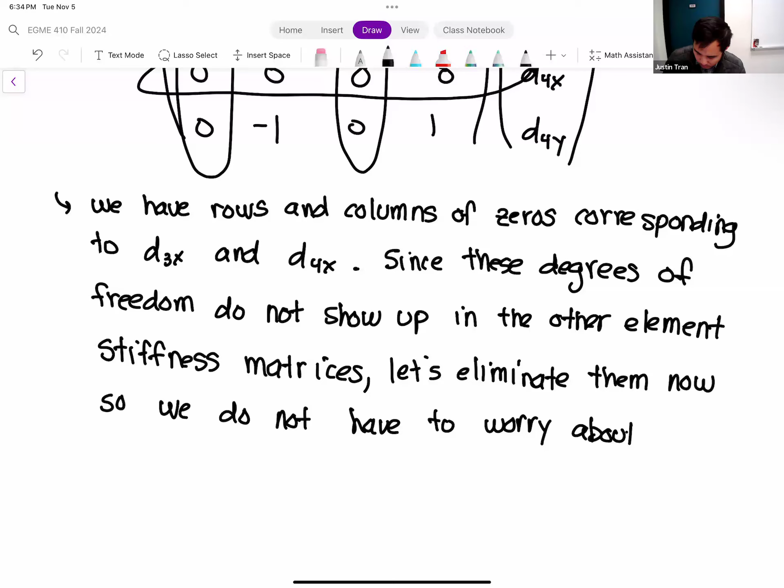Okay, so if we eliminate these rows of zeros and eliminate these columns, our element stiffness matrix for the spring actually becomes a lot simpler. For the spring, we end up with 1 minus 1, minus 1, 1, multiplied by k, then we have d3y, d4y.

All right, so that saves us a lot of work. That saves us from writing 2 whole rows and 2 whole columns in our global system, which, when our global systems are starting to get very large in terms of the number of rows and columns, saves us a lot of work. So before you jump into assembly for these systems, try to take a moment to pause and see if you can simplify the system at all. Sometimes it can save you a lot of work.

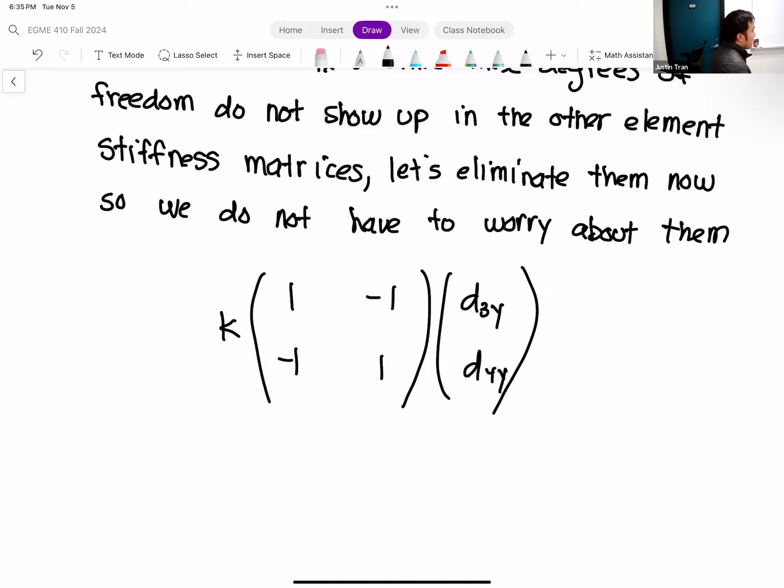Okay, and with that out of the way, let's go ahead and jump to assembly. So we're going to assemble our global stiffness matrix here. Let's count the number of degrees of freedom that we have. So we have 3 nodes that are connected to beams.

So those are going to have 2 degrees of freedom associated with those nodes, that's a dy and a theta. So that's already 6 rows and 6 columns that we have to account for. And then we also have 1 node here that's simply connected to a spring.

I know it's attached to the ground, so it's going to be zeroed out anyway, but just for completeness, let's go ahead and include it in our matrix. That node there, the one that's only connected to the spring, is only going to have a translational degree of freedom, so it's only going to have its axial deformation dy. So in total, the amount of rows and columns that our matrix is going to have is 7. So 7 rows, 7 columns.

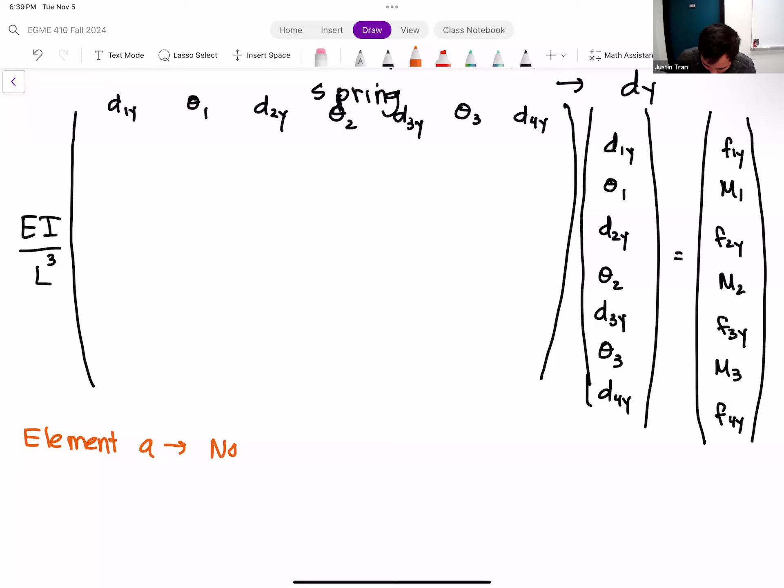And let's start filling in. So first we have element A. Element A is connected to nodes 1 and 2. Let me go ahead and box out that area of the matrix there. Let me go ahead and fill in those entries there as well. We have 12,

6L, minus 12, 6L, 6L, minus 12, 6L. Then 4L squared, 6L, 2L squared. And then we have this overlap region, so that's going to be 12, minus 6L, minus 6L, and a 4L squared.

Okay, next we have element B. Element B is also a beam, and is connected to nodes 2 and 3. So that's going to be this section right here.

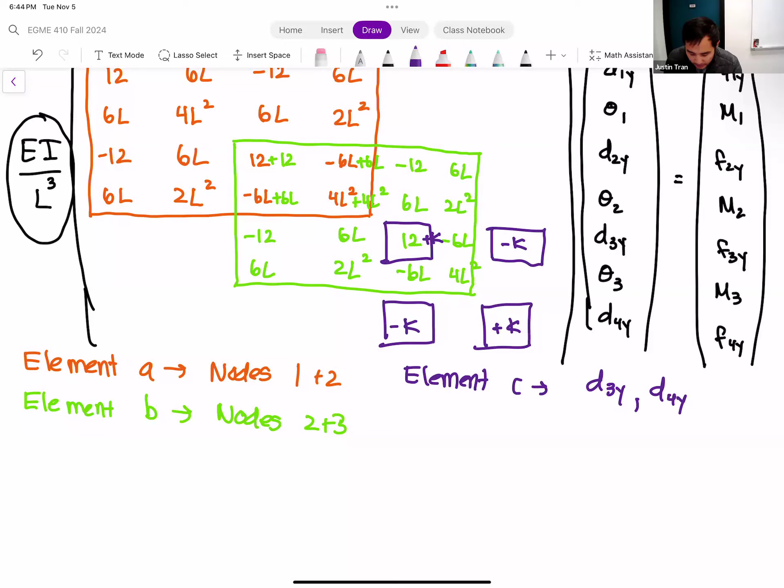So what we're adding in here is not K. Let me zoom in so you can see. We need to multiply by K multiplied by the inverse of our factor out in front. So instead of K, we're going to add K multiplied by L cubed divided by EI, minus K times L cubed divided by EI, minus K multiplied by L cubed divided by EI, plus K times L cubed divided by EI.

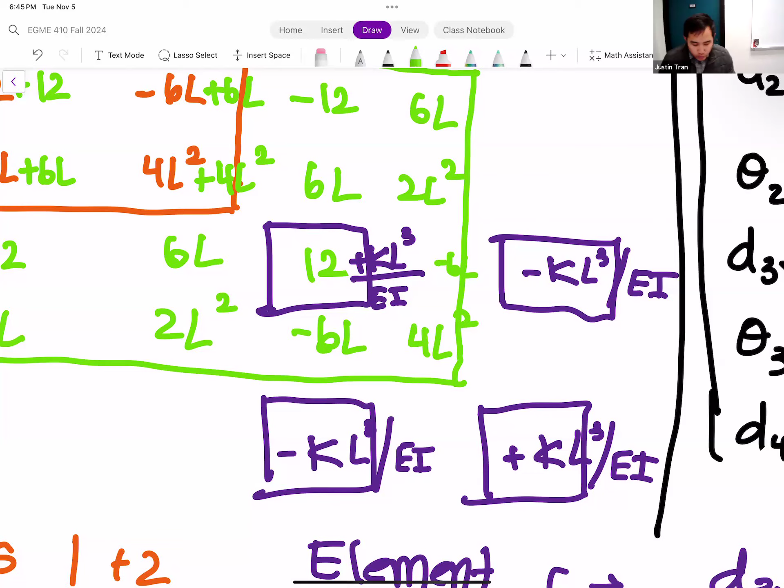Let me rewrite that: minus KL cubed. The reason we're multiplying that K by L cubed over EI is we're basically undoing our factor out in front here, which is EI over L cubed. So we're multiplying that by the inverse, which is L cubed over EI.

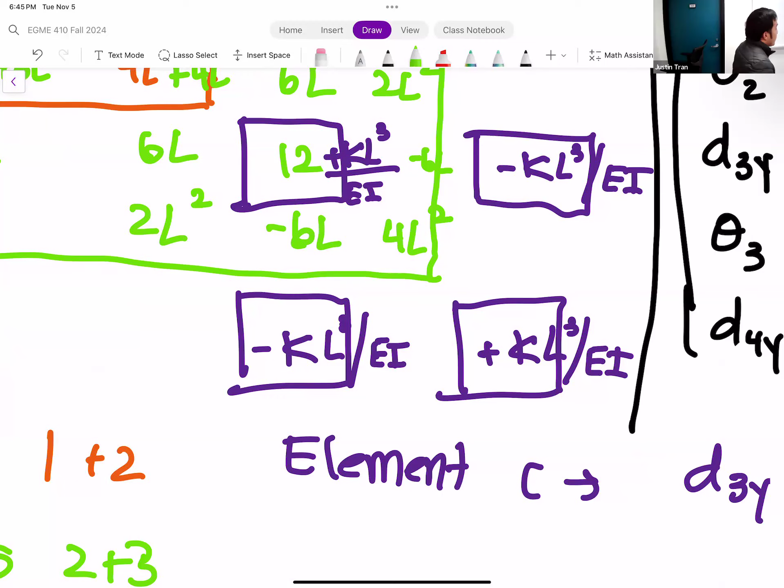All right, any questions on this? Let me go ahead and zoom out so you can see the whole matrix again.